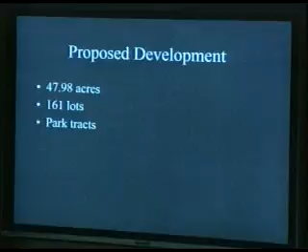This is the layout for the preliminary plat. Phase 2 is proposed to be constructed in essentially two subphases - Phase 2A on the south, Phase 2B on the north, roughly half the south half being the first phase, the north half being the second phase.

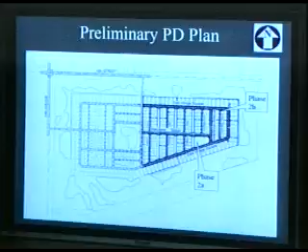As far as traffic circulation, the existing access points will serve the new development. There's an existing access point to 16th Street, which is now paved, and 74th Avenue. Those existing entry points will continue to be used - there'll be no more external access. Access will be through those points, and then the individual lots will be accessed from internal streets within Pointe West or within the new construction.

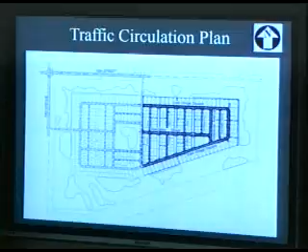As far as improvements, the applicants are required to provide streetlights, and those streetlights are required to be provided prior to a certificate of completion. That's really the completion of all the horizontal construction, paving, grading, drainage, utilities - those types of items. So the streetlights would be part of that.

As far as sidewalks, the sidewalks for the common areas would also be prior to a land development permit, and those are the areas where the park tracts and things like that for the common areas. Sidewalks for the individual homes will be constructed with the individual homes as they are constructed.

So essentially, a lot of times those sidewalks, if constructed early, get constructed twice because they get torn up with the home construction. As far as new models, the applicants indicated that there won't be any new models proposed. If there are new models, essentially they need to be reviewed by staff prior to being implemented, so we can make sure that they're consistent with the overall Pointe West conditions and the TND criteria for those models.

As far as environmental issues, there are specimen trees on the site, and those will require a mitigation plan prior to the issuance of a land clearing tree removal permit, and also prior to the issuance of a land development permit. So really, prior to beginning any earthwork, the mitigation plan for the specimen trees will need to be in place. Secondly, there's a small wetland on the site, and again, prior to any land clearing, tree removal, or land development permit issuance - any earthwork - the applicant will need to obtain a wetlands resource permit.

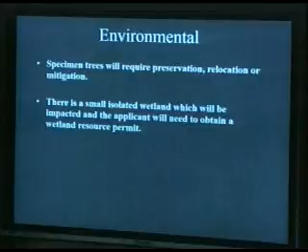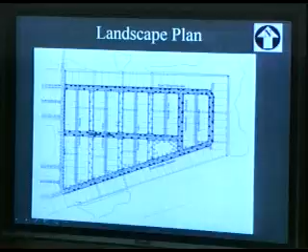With that, I would like to get to the landscape plan, and it's primarily a street tree plan, a greenway plan, and a plan for landscaping the common areas. This is the common area tract, and as with some of these, the houses will front a greenway with sidewalks, and those are the trees you see in these white areas here.

With that, I would like to get to the recommendation. Staff does recommend that the Planning and Zoning Commission grant preliminary PD approval with the conditions as listed. Those include the streetlights, the landscape plan, the wetland resource permit, and the tree mitigation, and then any architectural design review if necessary. Thank you.

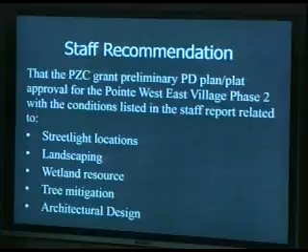Does anyone have any questions of staff? Would anyone like to come up from the audience and speak?

Good evening, Steve Moeller from Masteller Moeller for the record. John did a great job as usual describing our project, so I don't have anything to add. If there's any questions, I'd be glad to answer though.

Any questions? One question regarding the plan - noticing where the existing trees were in the southeast corner, there's an open space. Is that a pond, is that just a green space, or what exactly is it? I'd have to look at the plan - quite frankly, John Boyer from our office was more involved in the project design.

John, can you point that out to me where that might be? Let me see if I can go back to the - I think any pond would be on the golf course. In the southeast corner, are we speaking right here? No, right there, to the left. Here? There you go. Oh yes, that's a common area tract. That area is not proposed to be a pond - that is a common area tract that would be landscaped with trees.

Any further questions? Okay, can I get a recommendation? Move to approve with staff's recommendations. I have an approval by Dr. Day to approve with staff recommendations. I have a second from Commissioner Waltrip. All in favor? Aye, aye. All opposed? The decision is unanimous.

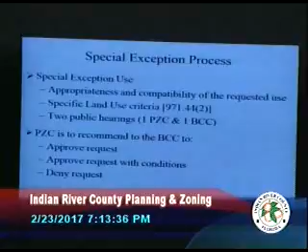I'll start with a brief overview of the special exception process. Special exception uses require appropriateness and compatibility of the requested use with the subject site, and generally those are what are deemed the general criteria for special exception uses, or the 97105 criteria, as well as the specific land use criteria for the specific use itself.

The special exception use process requires 2 public hearings, one of which we're holding tonight in front of the Planning and Zoning Commission, and a subsequent public hearing in front of the board. The Planning and Zoning Commission is to recommend to the board to approve the request, approve with conditions, or to deny the request. The board will make the final ruling.

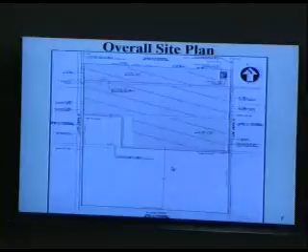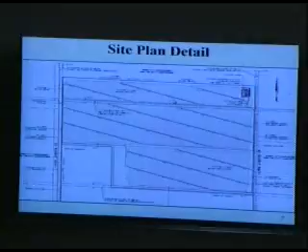Here's a slightly zoomed in version, although it's still hard to make out some of the details. Again, this is a rather large site. But generally it shows the solar arrays, which are the very small rectangles. It's hard to make out at this resolution, are individual panels. When linked together, they comprise a solar array, as well as the stabilized access pathways that run east-west and in a northwest to southeast configuration, and an on-site substation.

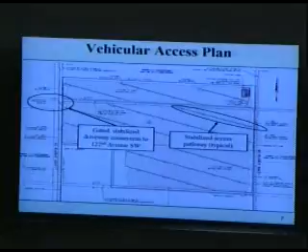Here's a detail of the vehicular access plan showing a gated, stabilized driveway connection to 122nd Avenue Southwest, and that typical stabilized access pathway. The angled pathways are generally 16 feet wide, and the east-west pathways are generally 20 feet wide. And here's a detail of the driveway connection to 122nd Avenue Southwest.

The project access route is generally from I-95 to the intersection of State Road 60 and 122nd Avenue, then south down 122nd Avenue to the project site. Some of the materials will come from the west, from the turnpike, but generally speaking, most of the construction vehicles will come from I-95.

There is a condition in the staff report, as recommended by the Public Works Department: there are several, if not one or more, county culvert crossings along the construction access route that will need to be reinforced with asphalt millings to help protect the culvert crossings themselves. A majority of the southern portion of the route is actually within the St. John's Improvement District, so that will be subject to their protocols, but the county right-of-way culvert crossings will be reinforced per the Public Works Director's recommendation.

I also want to mention, while I'm on this slide, the subject site is actually currently 3 different parcels, and the solar arrays do span at least the northern 2, so we are requiring a unity of title to combine those 2 parcels. They have the option to combine all 3 or to leave the remaining parcel, which will be vacant, as a separate piece.

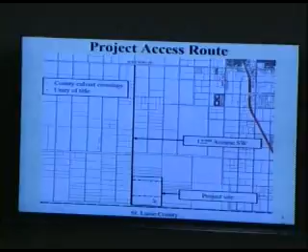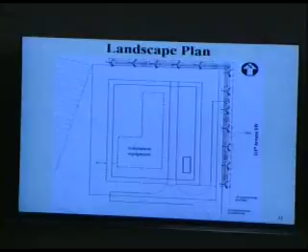This is a detail of the landscape plan, which generally is only at the substation itself at the northeast corner, and really it's just the perimeter of the substation. The south and the west are interior to the site and are not required to be screened with landscaping, but the outside perimeters will be provided with landscaping as shown on the plan.

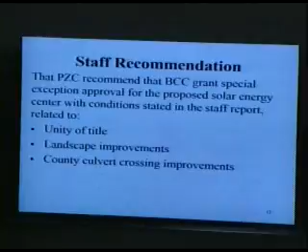And with that, I'll get to staff's recommendation, which is that the Planning and Zoning Commission recommend to the board to grant special exception approval for the proposed solar energy center with conditions stated in staff's report. Those include the unity of title, the landscape improvements, and the county culvert crossing improvements. Thank you. Does anyone have any questions of staff?

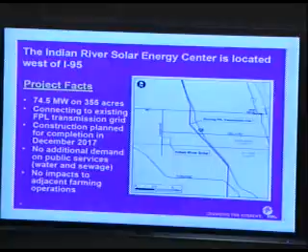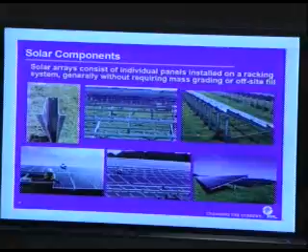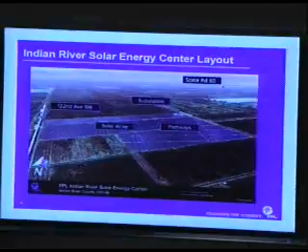As you can see from the aerial view, there are no residential neighbors around the site. We are really excited to bring the first utility-scale solar facility to Indian River County. Like many Floridians, we're big fans of solar, and we look forward to constructing this site in the county. We expect to employ about 200 construction jobs throughout the construction cycle, and once in operation, the panels will sit quietly, just harvesting emissions-free energy for Indian River County and for Florida.

We appreciate your time. We look forward to continuing this relationship with the county, and we are open for any questions that you may have.

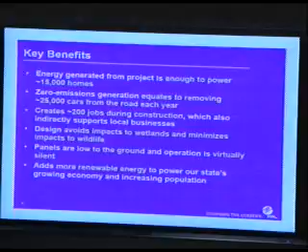Any questions? I've got one. What's your protocol for securing the site in the event of an approaching hurricane and the tornadoes that might spawn?

The panels themselves will be installed with braces. They've been tested for very high wind loads and will be installed per the Florida Building Code. We did have sites near the Kennedy Space Center that experienced a bit of Hurricane Matthew, and we did not have any issues with those panels at that site. So we do not anticipate any issues.

Any further questions? A couple. You mentioned the wind loads - what exact wind velocity are they scheduled or set up for? I do not know the answer to that, but maybe someone in the audience from my team can answer that question. This is Kelly Fagan with our construction team.

For the record, Kelly Fagan with Florida Power and Light. Again, thank you for having us this evening. We design to the Florida Building Code wind loading maps, so the current wind loading for this site is about 120 miles an hour, and we will design to those loads. The panels, posts, and piles typically are designed for higher wind loads because they're standard materials - you'll see anywhere between 145 and 150 miles per hour for those components. The thing we do our wind loading testing on are the clips or clasps that actually hold the panels onto the frames, so those will be wind load tested for the actual wind load in the area.